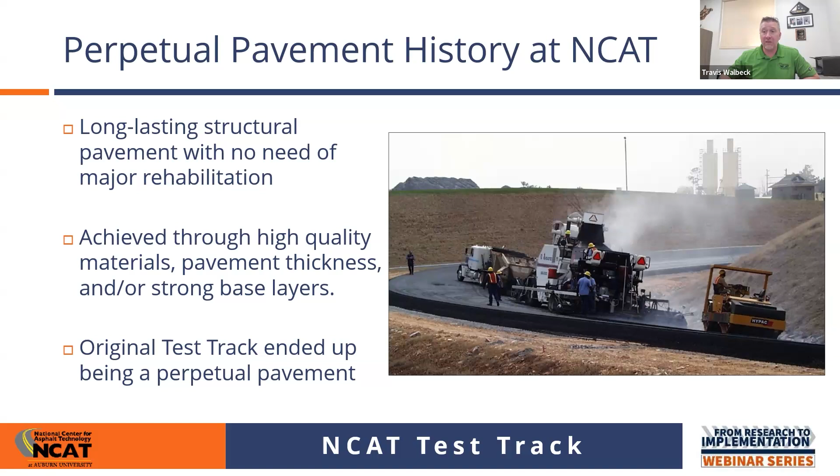So a couple of ways we can do this. We can just build the pavement really thick. NCAT test track originally built 2 feet thick, 24 inches, tremendous tonnage - that's one way to do it. Another way to do it is through really high quality materials. Some of the polymer modification or the binder rich layers that we've been able to put in have helped us build some perpetual pavements. So again, there actually are 2 sections on the test track that are currently in service that have never been rebuilt, and so it's really fun for us to see and watch how those sections perform.

So the thickness, the original 2000, that's one way to do it. This here is a graph that essentially shows a 14-inch pavement, right? That's far thinner, but it was built with this binder-rich bottom layer. It was put in place, a couple intermediate layers there, and an SMA on the surface. This full-depth hot mix section has performed just as well. It was put in in 2006. The strain gauges are in there that can gather all that data and watch and see how that performs.

So we only see top-down cracking. It's the only kind of cracking we see in this kind of perpetual pavement, which really does our heart good because we know structurally it's performing well. We just need to take care of the weathering or the environmental distresses we would see at the surface.

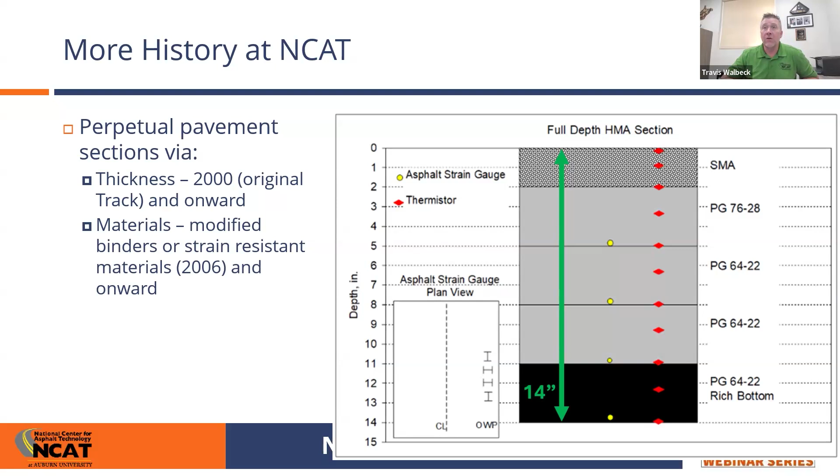So given that, I want to turn the time over to Suri, and he can go ahead and show you some of his work that he's done with these full-depth HMA pavements, and we'll go from there.

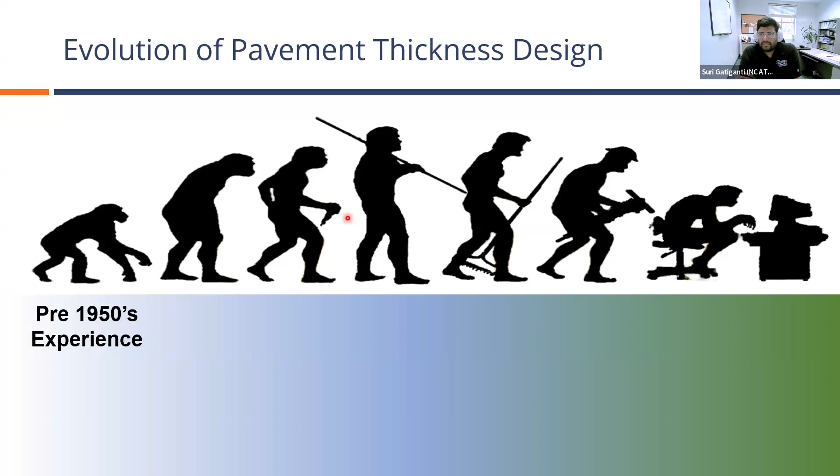A snippet of the evolution of pavement thickness design in the United States: pre-1950s, we were pretty much designing our pavements based on experience. But then in the late 1950s came the AASHO test, which formed the foundation for the empirical methods we're seeing, including the AASHTO 1962 design methodology and also the 1993 design methodology, which many states are still using, what we call AASHTO 1993 or Darwin software.

In the early 1980s, with the NCHRP 1-26 project, we started looking beyond just the empirical standpoint, because empirical equations could only account for the materials used at the AASHO test, the climate of that one location in Illinois, and the same subgrade material used in the AASHO test itself. The mechanistic-empirical methods can now take the mechanistic part of calculations, in terms of stresses and strains, into account along with the empirical equations.

In the 1990s, NCHRP 1-37 started, taking most of the LTPP data sets to form what we currently call the MEPDG software, which was released in 2004. Many states are currently in the process of adopting it, and many states already did adopt MEPDG as their primary design tool.

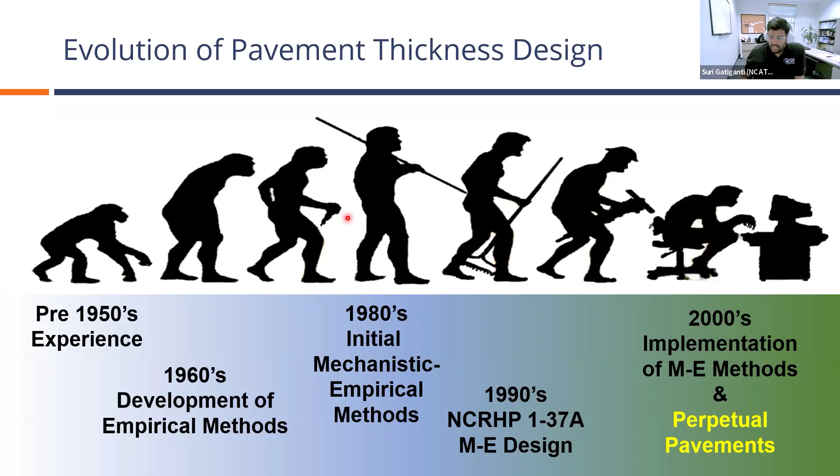So that's all about conventional pavement design. But what's happening in the perpetual pavement design scenario? Perpetual pavements were also kicking in during the same time frame, the 2000s onwards, with help from Dr. Carl Monismith's work and Dr. Thompson's work from UIUC, and from a lot of effort from the Asphalt Pavement Alliance and the NCAT Test Track. So I'm going to cover the perpetual pavement aspect of the story.

As I said, the majority of the empirical and ME approaches, the conventional flexible pavement design methods we have, including the '93 and MEPDG, rely on empirical and mechanistic-empirical approaches. The goal is basically to optimize the thickness. The goal of pavement design is to find how many inches of asphalt layer are needed, given the base, location, traffic, and materials in your state. What thickness do I need to come up with? That's the whole goal of conventional design approaches.

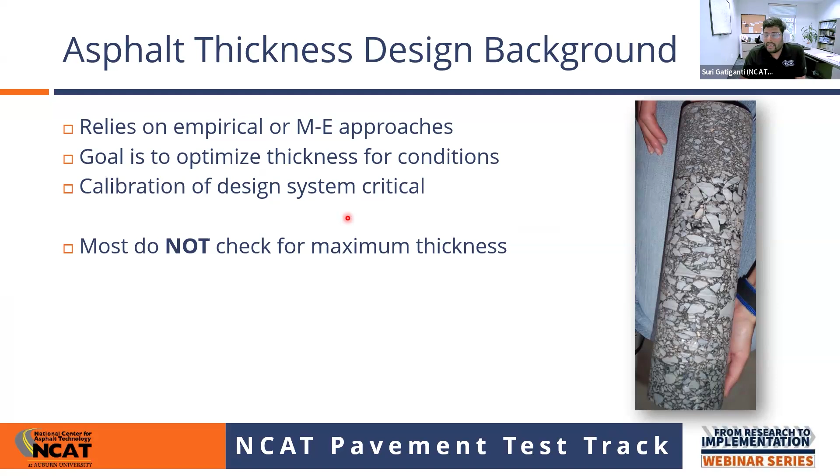But the problem is we do not check for maximum thicknesses. As Travis said, with the experience of the original test track, we got 24 inches of asphalt concrete, two feet. That looks like too much, right? So there is no check for a maximum thickness.

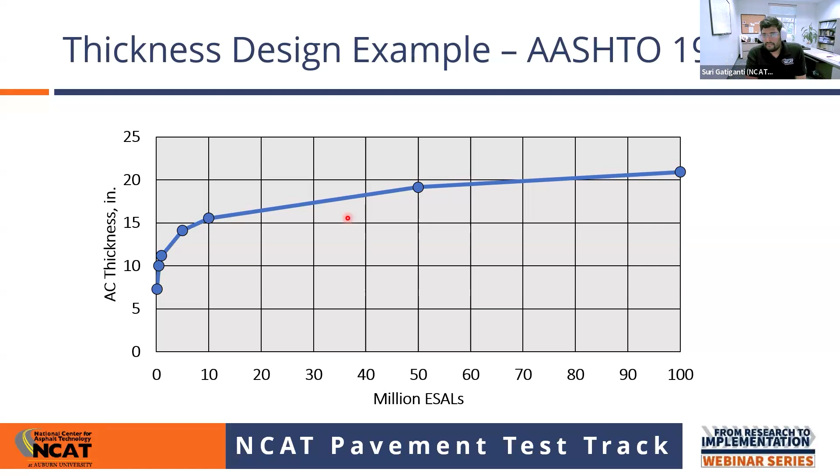If you see this in a more graphical format, here's an example. If you run the 1993 analysis or design with varying design ESALs, the equivalent single axle loads, because of the way the empirical equation works—it's a mathematical equation that takes million ESALs as an input—it keeps throwing out increased asphalt concrete layer thicknesses. If you say 50 million ESALs, it will say you need to build a 19-inch asphalt concrete layer. That sounds highly conservative because it's too thick.

But the question is, how thick is thick enough? Do we have a control or a check, a way to cap the thickness of the asphalt concrete layer, so that beyond that point, even though you're building your pavement thicker, there's no practical use of it? It's basically sitting there and serving no purpose.

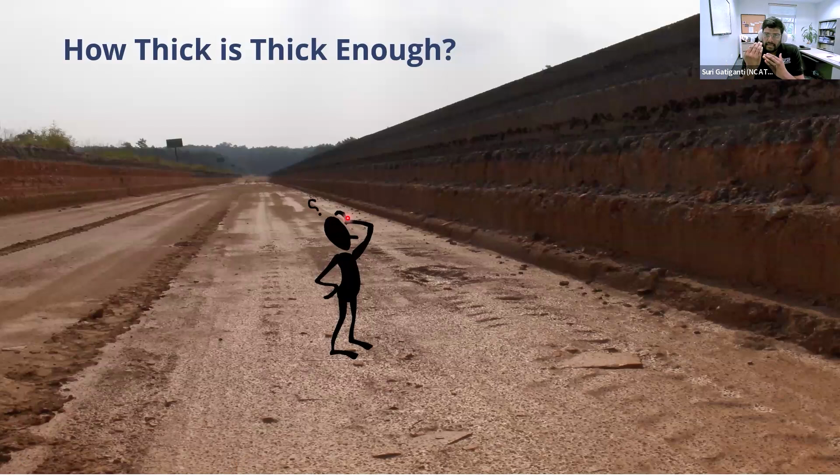And that is when we have the perpetual pavement concept. As Travis said, the whole definition of perpetual pavements is basically, if we build our pavements either by thickness or by using high quality materials, we control the structural distresses. Without any structural distresses, if we can confine the distresses only to the surface, we don't have to go back and do a major rehabilitation, like a complete reconstruction effort. If we can control the bottom-up fatigue cracking, which is structural damage, and also the subgrade rutting, and only limit the distresses to the top of the pavement, we can come periodically and just mill and fill that particular layer. So that way, we are basically saving a lot of material. That's the whole concept of perpetual pavements.

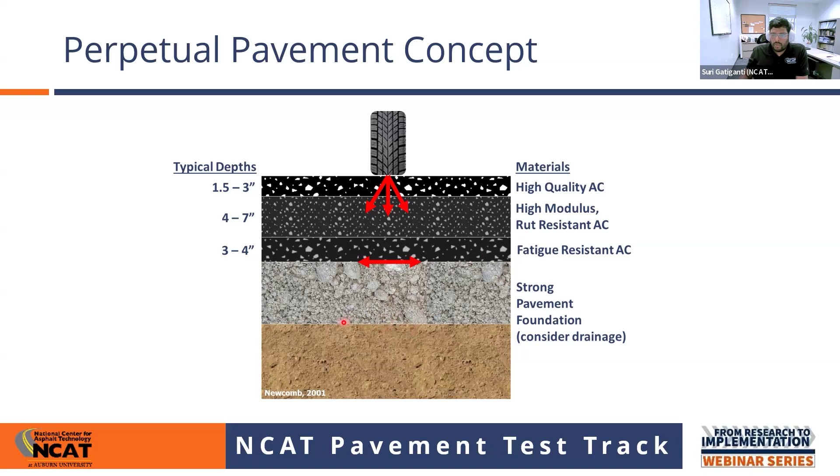The original concept was proposed in the United Kingdom, and then adopted by California, by Dr. Monismith's team for the I-710 project, and then adopted for one of the projects in Denver. The whole philosophy of all these initial perpetual pavement projects, as Travis said, is to have your surface layer as a high quality rut resistant mix, have your intermediate asphalt concrete layer a high modulus, high rut resistant asphalt concrete mix, and have a rich bottom layer which can resist fatigue cracking, all built on top of a strong foundation. That way, you're not allowing much stress to go to the subgrade, and you're protecting the subgrade that way.

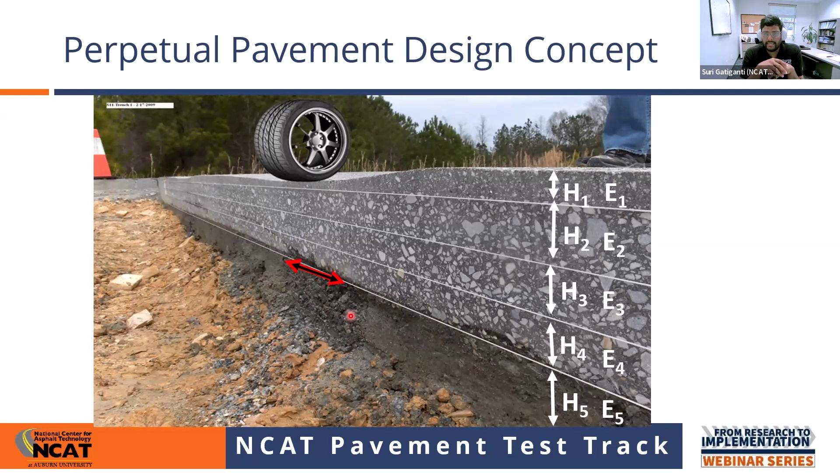As I said, this is a schematic that shows what we will be doing. The perpetual pavement concept itself is controlling the bottom-up fatigue cracking. We know once we apply a load on top of an asphalt concrete pavement, because it's flexible, it generates tensile stresses at the bottom of the AC. So our goal from the design perspective is to control that strain level to a certain value, so that we're not initiating the bottom-up fatigue cracking. Also, to limit the strain on top of the subgrade by controlling the stresses going onto the subgrade, so that we're not seeing any structural rutting happening.

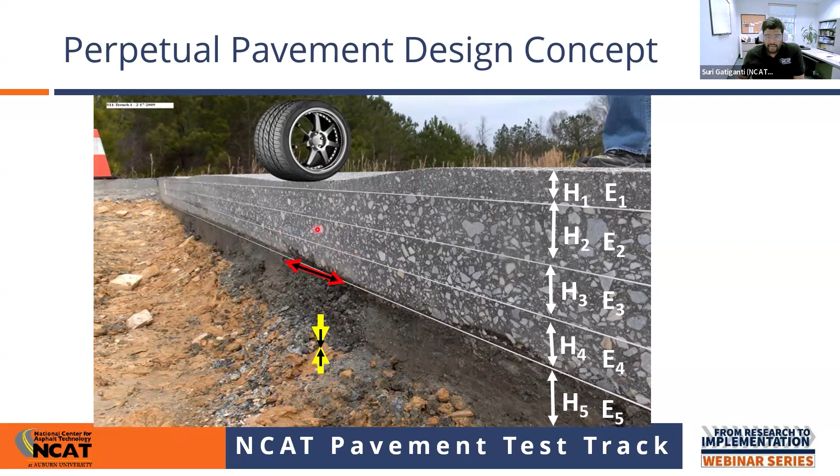Today's presentation, I'm going to primarily concentrate on the bottom-up fatigue cracking, because structural rutting is not a driving force once we start designing these perpetual pavements to define the thickness—it's actually the bottom-up fatigue cracking. And I'm going to spend most of my presentation time on the research that we did at the NCAT Test Track regarding the bottom-up fatigue cracking.

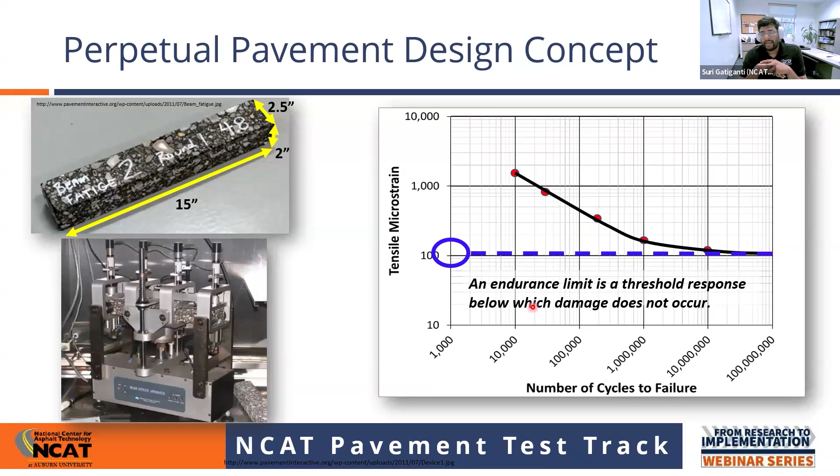For some of you that know a lot about asphalt mixture testing, the bending beam test is basically a strain-controlled test. As we decrease the strain level that we're applying on the beam, we start seeing increased life, because reducing the strain allows that beam to sustain for a longer time. For any material, there is something called an endurance limit. If you're applying a strain value below that endurance limit, that material is going to stay there for infinite life—meaning you're not causing any fatigue cracking or fatigue damage to that material.

Over the years, different researchers have tried to determine if there is an endurance limit for asphalt. In steel, the endurance limit is a big concept. In 1972, Dr. Monismith, with his research from UC Berkeley, came up with a number: 70 microstrain. If you're applying a strain less than 70 microstrain, that material is going to be perpetual, or that pavement is going to be perpetual. They used that 70 microstrain value for the I-710 project.

In 2007, as part of a big NCHRP project that Dr. Ray Brown at NCAT led, which was a laboratory study testing a bunch of beam fatigue samples, what Dr. Ray Brown and his team found was that for unmodified binders, the strain criteria is not 70, it's basically 100 microstrain. And once you start looking at mixes with modified binders, that endurance limit criteria is even higher, which is 250 microstrain.

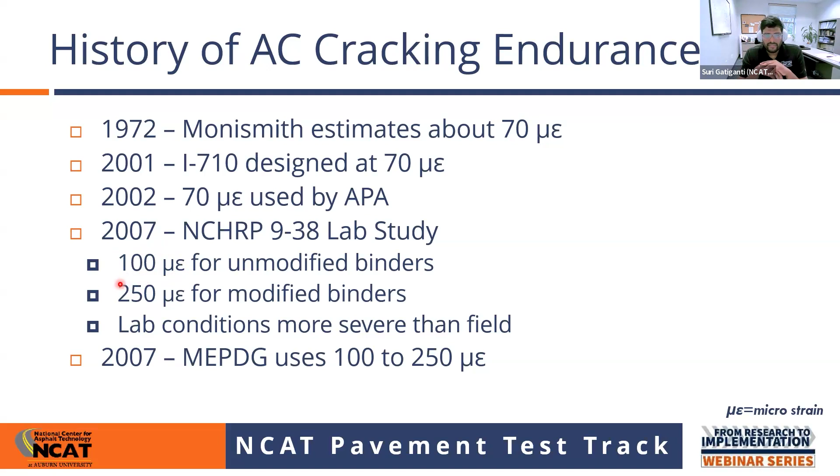But all the other studies until 2007 were looking at one single strain criteria. But we know our pavements are not going to experience one single load or one single temperature every day. Our temperature changes, thereby the modulus of the asphalt concrete layer changes, and on real roads we have axle loads that vary. So there is no single strain value that these traffic loadings and climate effects are going to produce. It's going to be a distribution at the end of the day.

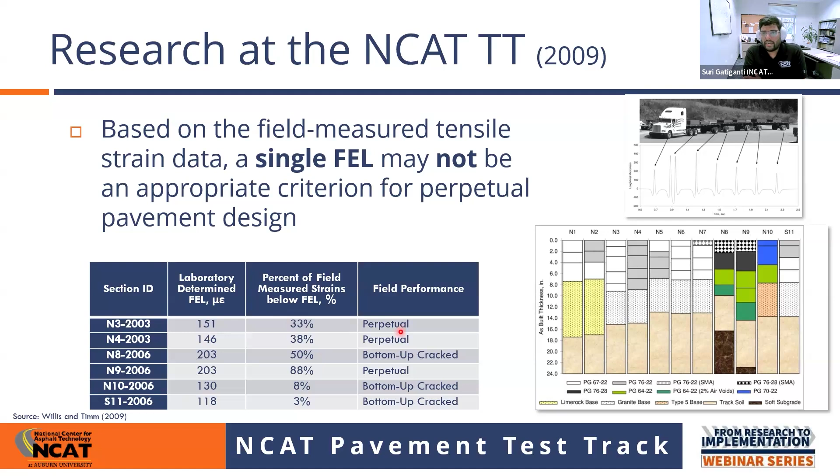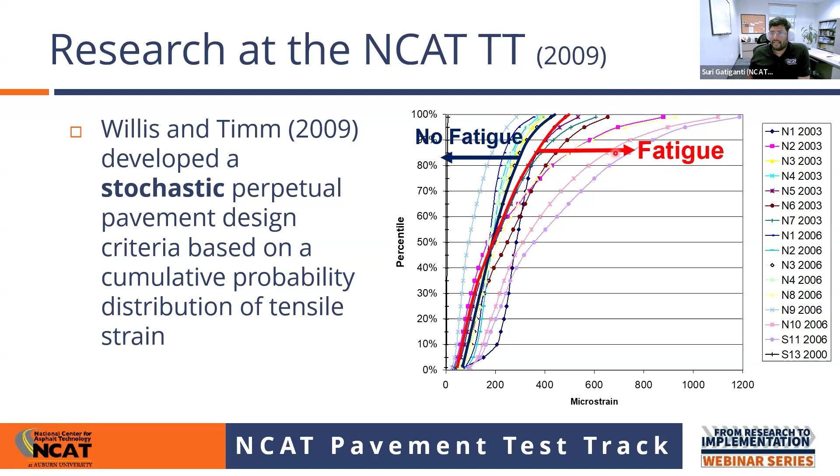So what they came up with is that there is no single strain value we can design our perpetual pavements with—it's a distribution. On the x-axis is the tensile strain at the bottom of the AC layer measured at the NCAT test track using strain gauges, and the y-axis shows the cumulative distribution. Sections that produced strain values lower than that dark solid line never saw any fatigue cracking, but sections that experienced higher tensile strain values than that red solid line did experience bottom-up fatigue cracking.

Those two demarcating points helped us come up with what's called the measured tensile strain criteria, proposed by Dr. Richard Willis and Dr. Timm back in 2009, based on field measured strains. But when designing pavements, we cannot use field strain measured values directly—we need to depend on some mechanistic calculation methodology, like elastic layer theory, because at the design phase you won't have the capability to embed pavements with strain gauges like we have at the NCAT test track. So we have to depend on linear elastic layer theory to design our pavements perpetually.

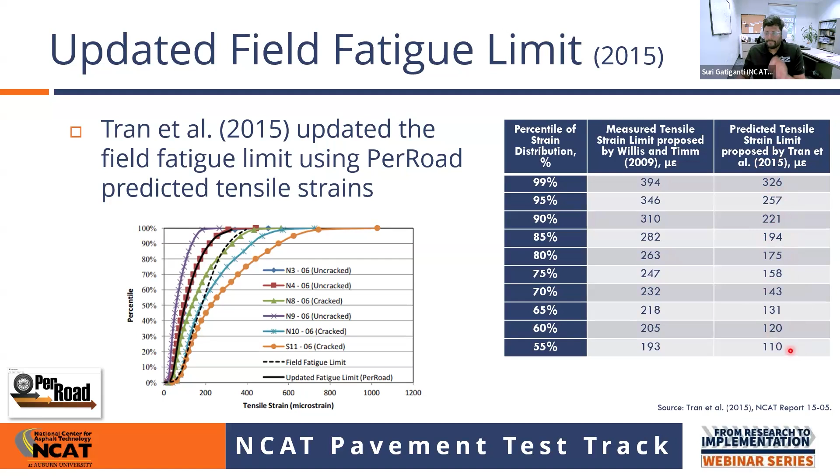So Dr. Tran and his team in 2015 came up with an updated strain criteria. If you're using the PerRoad software, the default threshold you see today is basically these values, shown on the rightmost side of the screen. This comes from the test track research in 2015.

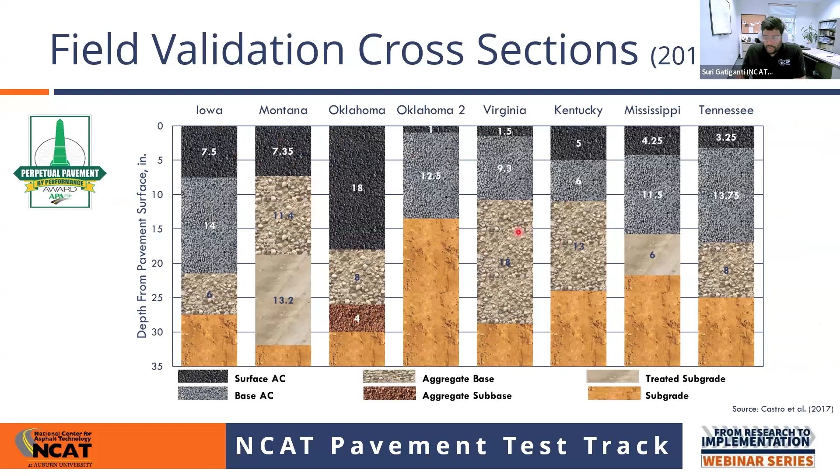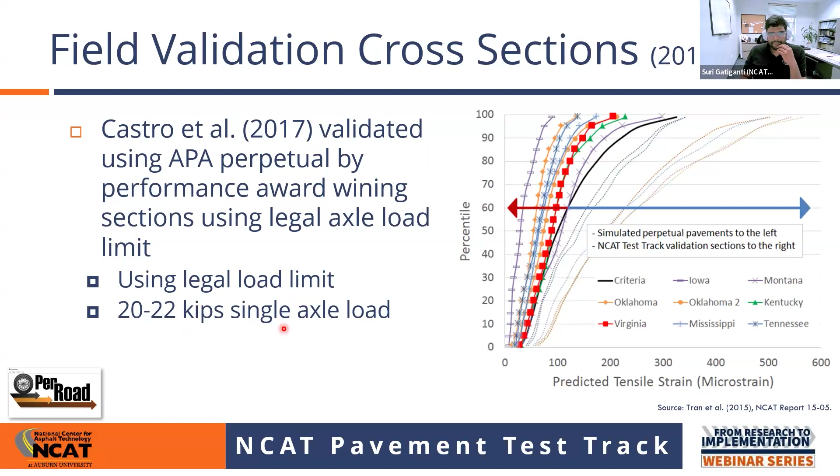But when simulating these strains, they did not use the actual axle loads that happen on a regular highway—they used the legal load limit with a 22 kip single axle load. I'm going to come to why that's important to mention. If you look at the NCAT axle load spectra, because it's an accelerated pavement facility, we have single axles.

We have five single axles weighing 20 to 22 kips load, a tandem axle between 38 and 42 kips, and a steering axle between 8 and 12 kips.

But if you look at the typical rural interstate axle load spectra developed by late Dr. David Newcomb and Dr. Timm, the NCAT test track loading is basically extreme, because it's an accelerated loading facility and we want to apply more number of axles in a very short span of time. So it makes sense that the axle loads we apply are very close to the US legal load limit.

All the studies you saw at the test track until this point—2009, 2015, 2017—were based on that high intense loading level. Even the validation work done in 2017 used the US legal load limit.

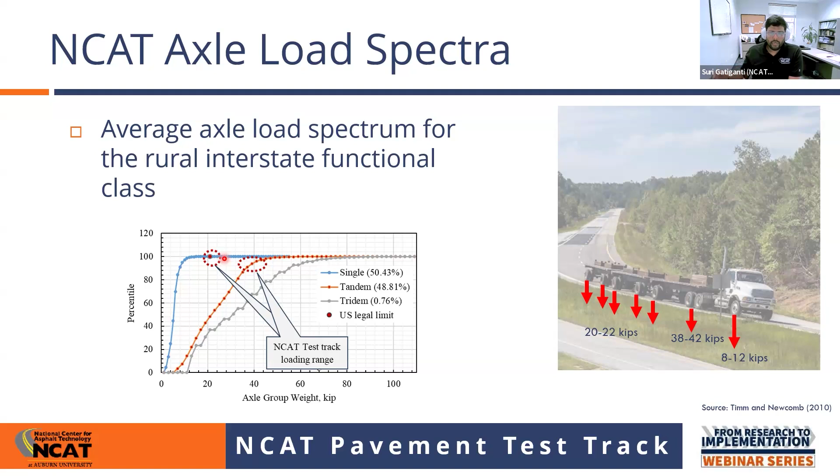But the actual question is, if I'm a designer working for a DOT, and I don't use the legal load limit but instead use my own axle load limit from my WIM data for the state, would this criteria still hold true?

So that was the question we wanted to answer: can the criteria that came from the 2015 study hold true if we apply the highway load spectra, which is much less intense than the NCAT test track or the US legal load limit?

So we got 31 test sections with the help of ALDOT from across the state, and we also have the coring information for all those test sections, so we know whether those sections had bottom-up fatigue cracking. If you see the right side of the screen, we know whether a section was bottom-up fatigue cracked or a perpetual section, and we were able to get that from the coring information.

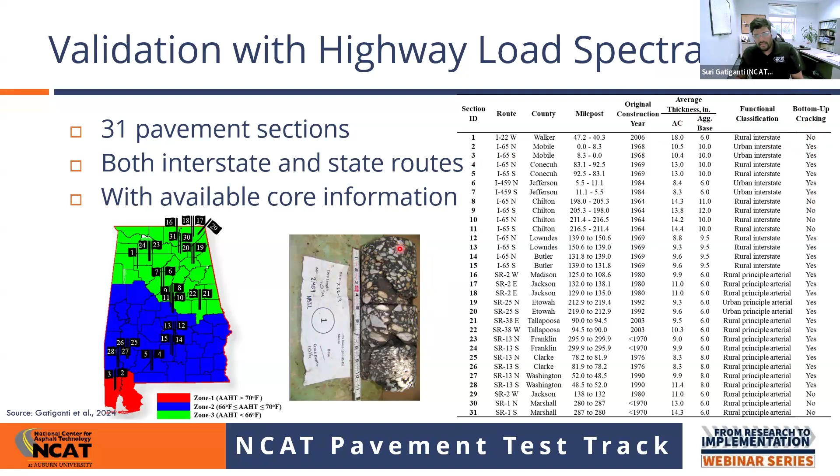So what we did is the same thing Alfredo and his team did in 2017. Even though these sections are on interstate or US highway, let's assume 100% of the time the pavement experiences that 22 kip single axle load, which is the extreme condition that pavement can experience.

When we used that to verify whether it's demarcating the sections that failed with bottom-up fatigue cracking from the sections that did not fail, it was holding true. All the red data points you're seeing are cracked sections, and all the green sections you see are uncracked, basically the perpetual sections.

Of the 31 different test sections, or actual highway sections, the black line—the threshold from the 2015 study—was able to correctly demarcate the perpetual sections with lower strain levels from the bottom-up fatigue crack sections, which had higher strain than that limit, in all 31 cases. So that was good.

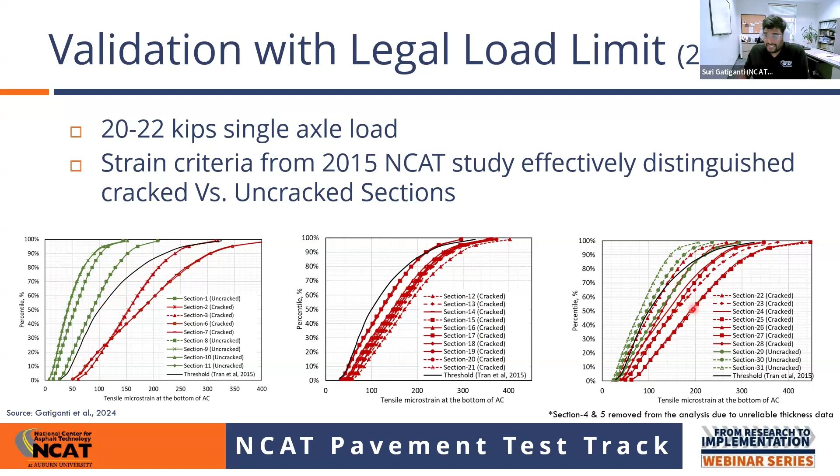But what if we simulate those sections differently, not using that extreme condition where 100% of the time the pavement experiences only that single axle, but instead using my WIM data to simulate my actual highway load spectra?

So the dark solid line you're seeing here is the one proposed in 2015, but it failed to demarcate or identify the sections that actually failed with bottom-up fatigue cracking.

If I'm using that criteria from 2015, all of these sections are supposed to not crack. But four of those sections did crack.

So what that means is, if you are using the legal load limit to simulate during design, you could use the 2015 threshold limits. But if you're a designer wanting to use your own highway load spectra, you cannot use that, because it failed to demarcate correctly.

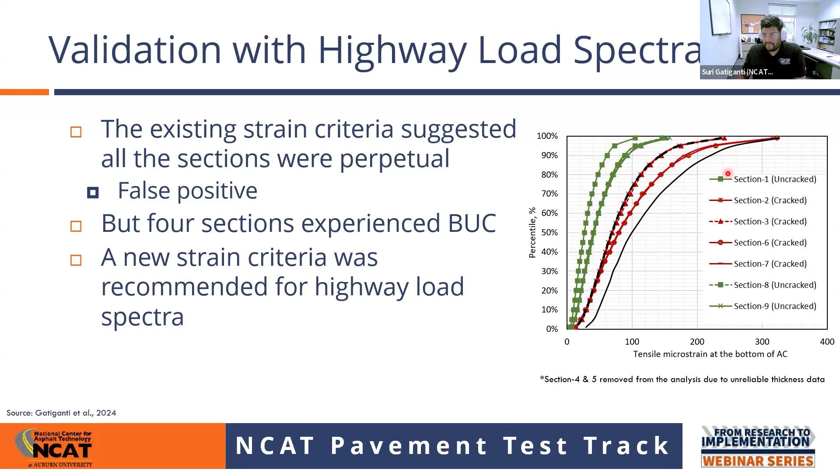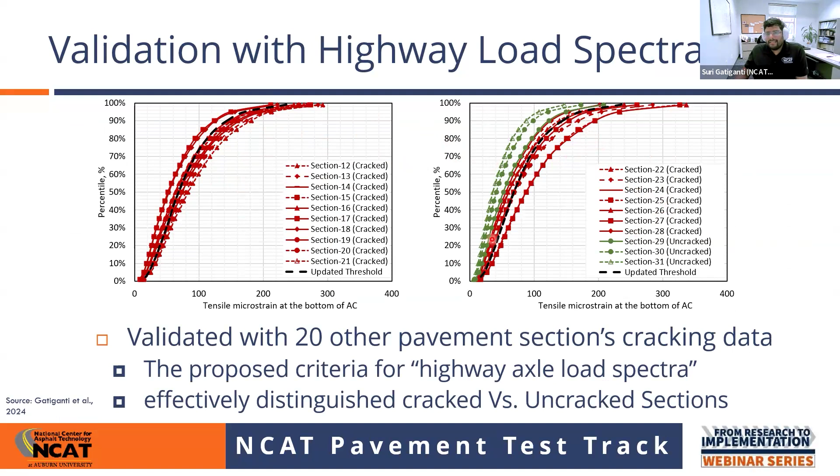That is why in the 2024 study we proposed a new threshold limit, a much lower threshold than the 2015 one, and verified it with other sections from ALDOT's highway network. The new updated dotted black line is able to correctly characterize the sections that failed versus the sections that did not fail with fatigue cracking.

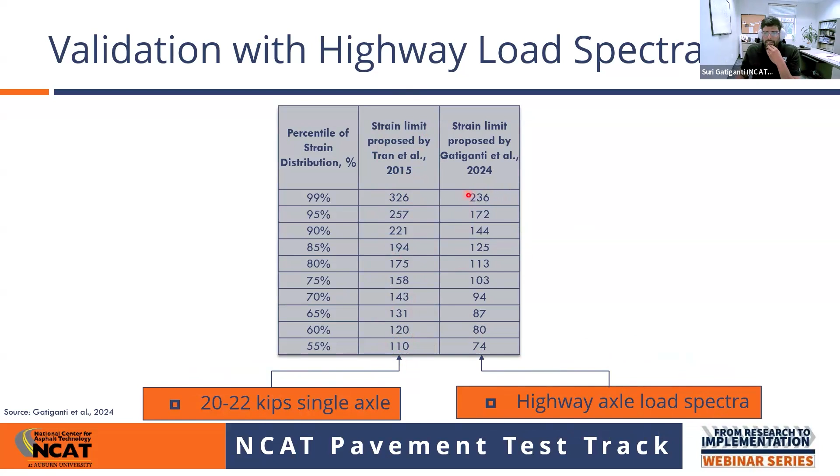So in the end, what we were able to find from 2015 to 2024 is basically, if you're using legal load limit during your design process to simulate your traffic levels, you can still use the 2015 threshold values, which are basically default in PerRoad software today. But if you decide to use the axle load spectra from within the PerRoad software, you have an option to select default values for an interstate versus a major arterial versus a minor arterial. If you decided to use that axle load spectra rather than the worst case scenario, please use the newly proposed threshold limits, which are much lower.

But how does this perpetual pavement design concept help agencies that do not right now use the perpetual pavement designs? What is the application of this concept from a regular conventional thickness process?

Because at this thickness, in this example of 12 to 13 inches, this pavement is never going to see any structural damages. It's going to only see damages in the surface layer. So we come back and mill and fill every 12 years or 15 years, depending on the state, as a preservation activity. But building those extra 6 or 10 inches, we are basically losing money without proper or optimized use of the material. So this perpetual design concept is very helpful to cap off thicknesses for a given state.

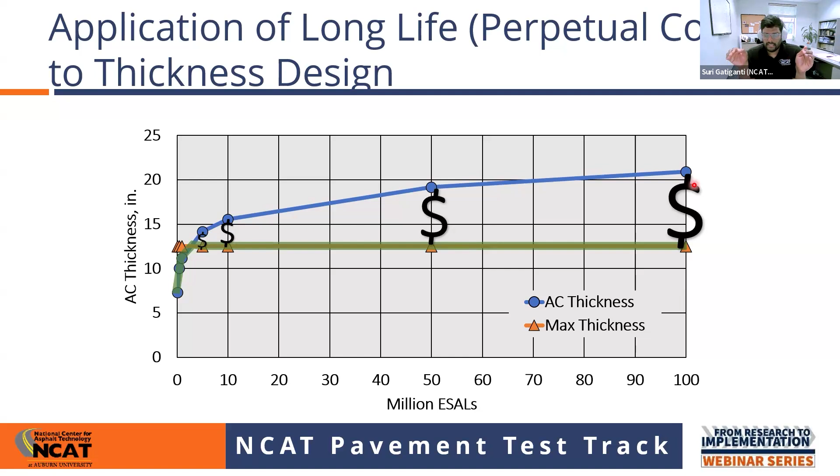As an application, we did the very same thing for LDOT, where we came up with max thicknesses. LDOT right now uses AASHTO 1993. If the thickness obtained from the 93 is above a certain value, we divided the whole state into 3 different zones depending on the temperature, basically the climate. The southern zones are the ones with the hottest temperatures, and zone 3, the northmost one, is where the temperatures are the coldest.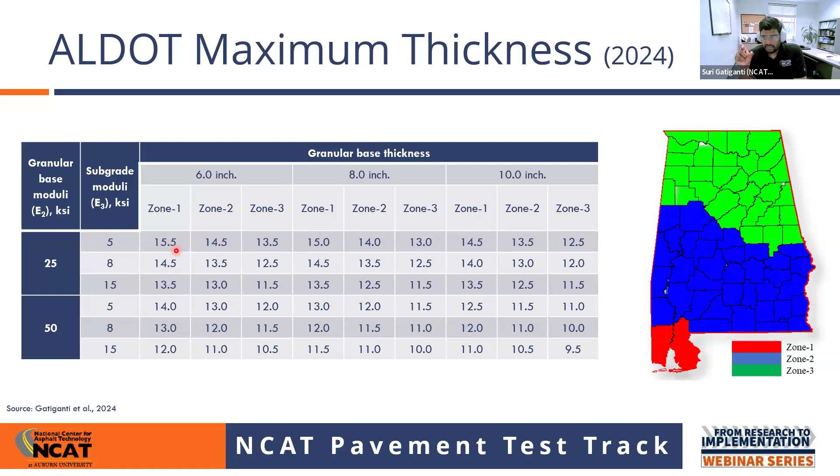So for example, these changes depend on the given base moduli and subgrade moduli. Let's say ALDOT is designing a pavement with 6 inches of granular base, which has a 25 KSI modulus value and a 5 KSI subgrade value, the max thickness we propose to ALDOT is 15.5 inches. So if ALDOT is using AASHTO 1993 for that scenario of pavement, if the thickness comes out to be 19 inches, they can just build 15.5 inches because this pavement is perpetual at that point, and that extra 3.5 or 4.5 inches is basically serving no purpose.

That's how the states can actually use this perpetual pavement concept in their regular conventional design as a cap-off criteria or as a max thickness criteria.

What are the softwares out there for perpetual pavement design? Dr. Timm developed PerRoad software, which is used for high traffic level road pavement design, perpetual design, which is embedded into PaveXpress today. So you can use either PerRoad or Pave Express, both of them serve the same purpose. But Dr. Timm also came up with another tool called PerRoad Express. This is for low volume roads. If you're trying to design low volume roads perpetually, we suggest using the PerRoad Express software. You can access the PerRoad software and PerRoad Express software from the QR code on the screen.

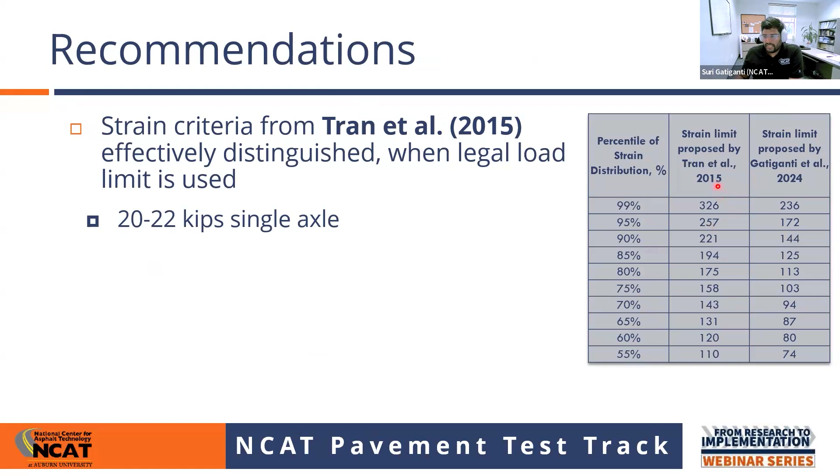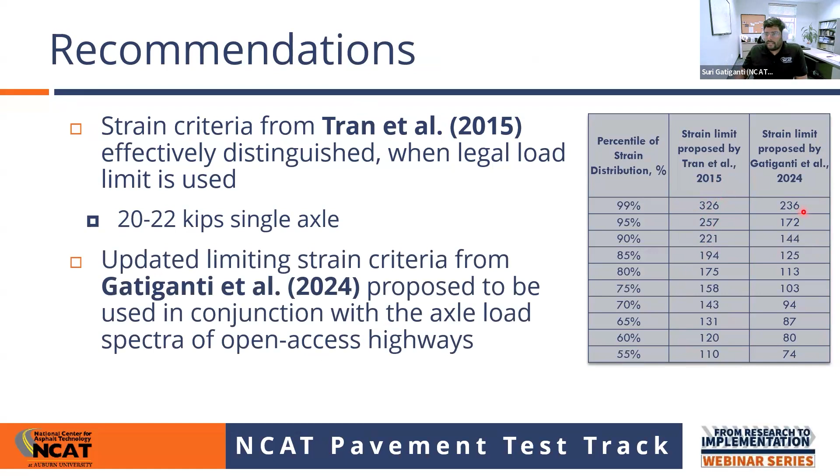In summary, the recommendations are: if you're using a legal load limit basically 100% of the time, that pavement is going to see only the 22 kip single axle. Please use the threshold from 2015 from Dr. Tran's study. But if you're trying to use the actual highway load spectra to simulate your pavement's traffic levels, please use the updated threshold values for limiting the bottom-up cracking.

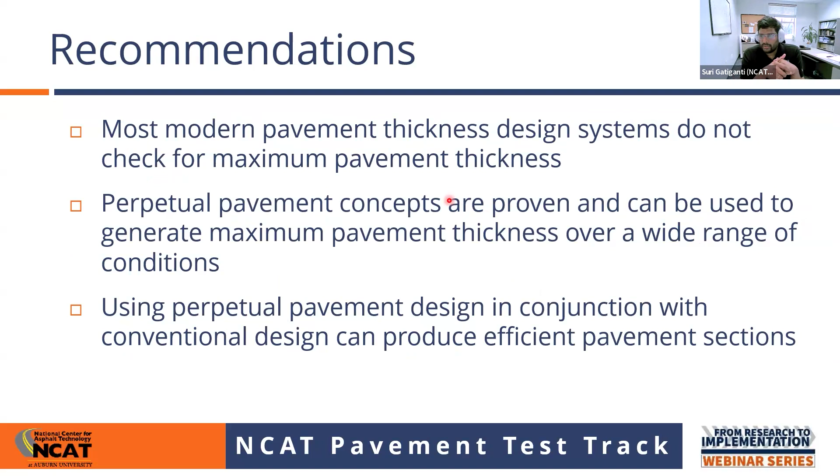Also, as we talked about, most of the pavement design thickness systems out there, including the 93 and sometimes MEPDG, do not check for maximum thicknesses. We do check for minimum thicknesses, but we never check for the maximum thicknesses. If we can adopt or combine the perpetual pavement concept with conventional designs like the 93 and MEPDG, we could basically optimize the usage of resources by capping off the maximum thicknesses.

And these are the references I use throughout the presentation. If you're interested, please go access those reports and papers. And with that, I'm going to hand it off to Mike.

Good morning, everybody. Thanks for joining us. Suri just shared a fantastic summary of how we got to where we are today with perpetual pavements and why they're important to the industry. I'm going to take that to the next step. Our role at the Asphalt Pavement Alliance is how do we take this message and turn it into deployable, actionable items for agencies and owners across the state. So let's go through that.

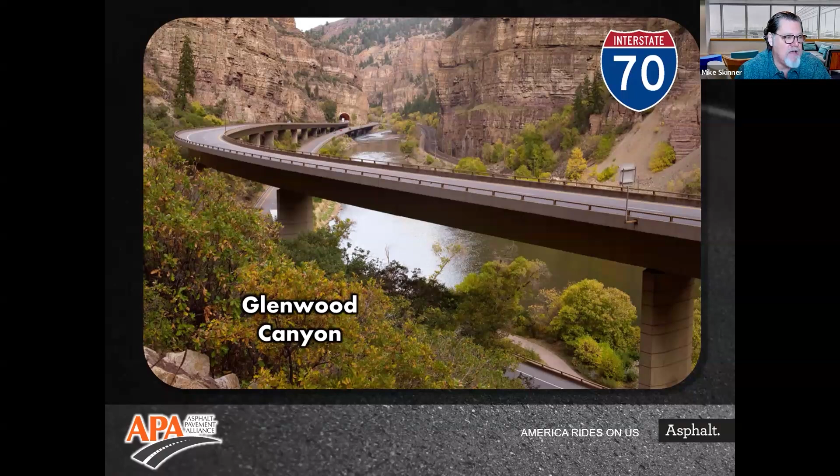But where I'm going with this picture is it talks about our industry in terms of resilience and quick, speedy recovery from accidents like this. This is another example, just like Red Mountain Pass, that if Glenwood Canyon closes, it's another 200-mile detour for all interstate highway traffic and cargo that has to detour up through northwest Colorado on small state highways.

So speed of construction, speed of repair, and resilience is really a hallmark of our industry. But let's talk a little bit about how we promote our industry and how we engage with local agencies and DOTs across the country. We do that through the Asphalt Pavement Alliance.

Those of you who aren't familiar with the APA, it represents the three premier stakeholders of the industry: the Asphalt Institute, the National Asphalt Pavement Association, and the 40 or so different SAPAs that exist around the country. In addition to that, we have strategic partnerships with NCAT and other industry associations.

But I like to have this discussion as we're talking about perpetual pavements, how we maintain our interstate highway system, the billions of dollars that are invested across the country. The blue lines there are the interstate highway system. The red lines are your state highway systems maintained by your DOTs.

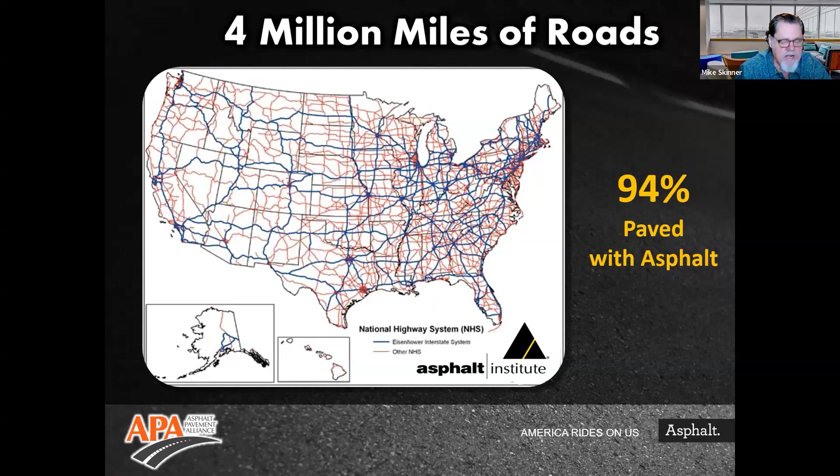But are we promoting it from commercial pavements? How do we promote and how do we leverage our brand and move forward? Perpetual pavements is a hallmark of the ability to do that. I'll show you an example in a minute.

Just last week, I happened to be over in Louisville, Kentucky for the NAPA mid-year meeting. I took a little side trip. Those of you that are familiar with Kentucky, you'll know that's home to the Bourbon Trail, which is the district. It's not an actual road, but it's a district between Louisville and Lexington with all the bourbon distilleries.

So I was back there driving the beautiful back roads of Kentucky, and I stopped and made a little video, put it on LinkedIn. I just said, listen, the Bourbon Trail, it's paved with asphalt. Look at these beautiful roads in the back roads of Kentucky. So those are some interesting ways that we promote the industry.

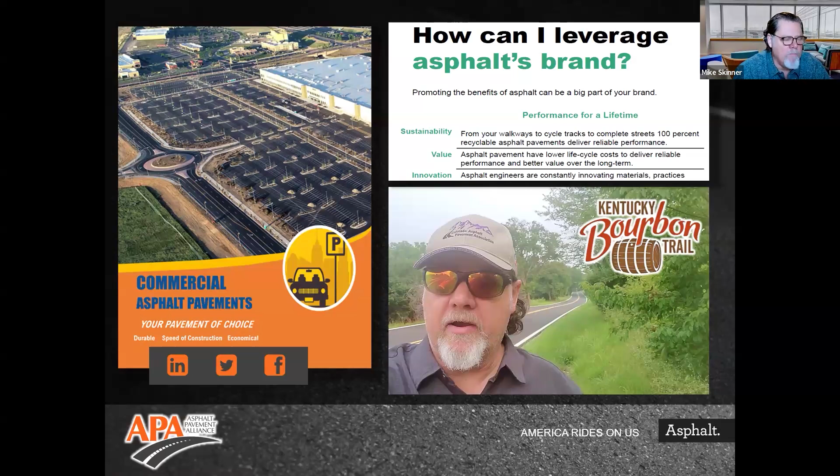But when we get to the topic of perpetual pavements, quality is truly the core of our industry. All of us exist to promote quality in our industry. And our perpetual pavement awards demonstrate that perpetual pavements are not just cost effective, but they're built to last.

And when we get into the cost effective element of perpetual pavement, that's a whole other webinar. But the initial construction cost savings to an industry can be very significant, that can either control the budget for a project, or at a set budget can extend it and add additional lane miles because of the perpetual concept.

So this was a photo that Suri showed a little bit, and I like to talk about general rules of thumb, because when we're talking about promoting an industry across the country and across the nation, we can't get too specific. But when you fall into that realm of 11 to 14 inches, you start to talk about maximum thicknesses. And if you're doing your designs with optimized materials, high quality materials, whether it be the aggregates or the mixed design philosophy, balanced mixed design, or using polymers in different applications, you can live in that 11 to 14 inch range and have it become perpetual.

Which Travis and Suri have both commented on, the fact that if we build it where we don't get structural cracking bottom up, and we only have to deal with surface cracking, which is significant where I live here in Colorado because of our extreme elevation, number one, and our freeze thaw cycles.

But if we can keep our cracking in the surface lift, then it's a win-win for the agency.

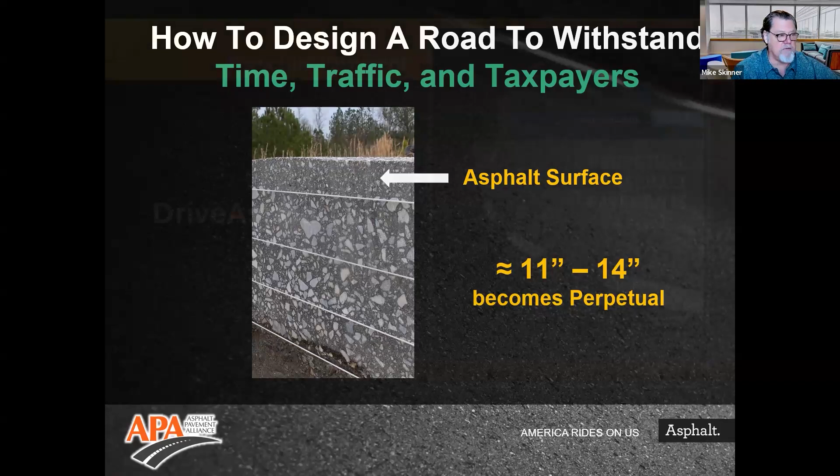So resources for you that are out there either doing design or considering this. We do see a little bit at the local agency level, and I'll talk about that in a minute. But for the DOT level, there are lots of great resources out there. One place I'd point you to start is the APA website, driveasphalt.org. There's a whole section there on perpetual pavements and resources curated from synthesis of information that will also lead back to the resource library available from NCAT as one of our partners. There's a plethora of information.

The last thing I'll share about resources is that here at APA, we are actively developing a new ebook, which will be published. Roads and Bridges Magazine is actually putting it together right now. It will live online and be about 20 pages, so short, sweet, to the point. It will not be a design guide, but a synthesis of current activities for perpetual pavements with hyperlinks to all other resources that will become available. Look for that ebook to come out a little later this year when it's finished and published.

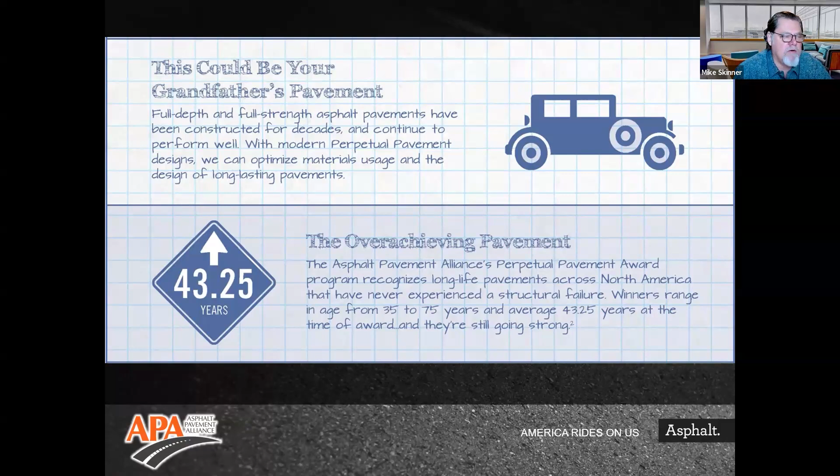So what does this awards program look like through the Asphalt Pavement Alliance? Typically a DOT will identify a segment of road. They might also do this in conjunction with help from their state asphalt pavement association, but they'll put together a submittal package and send it into the Asphalt Pavement Alliance. Once we collect all of these nominations, they're all submitted to NCAT for judging. There's a pretty rigorous set of criteria that NCAT reviews for every nomination to determine whether this road as nominated meets the criteria—I'll share the criteria with you in a minute—of a perpetual award. Then we get that list back from NCAT, and then we award the different winners.

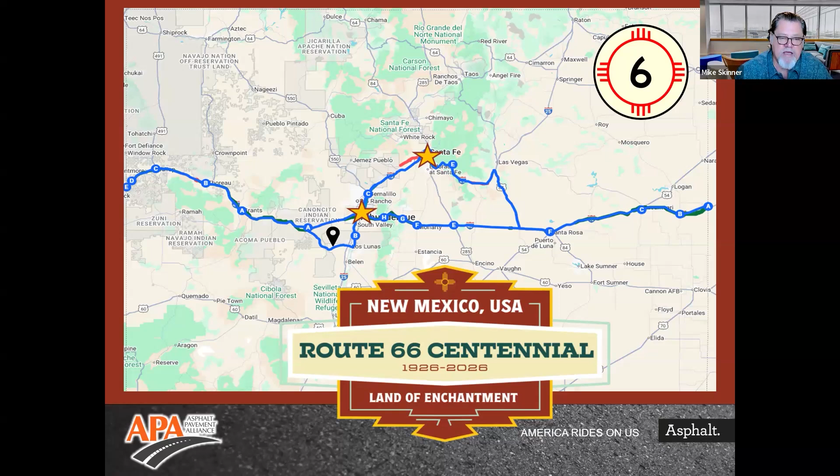So here's what that section looks like for the New Mexico DOT. That stretch was built in 1928. It's been resurfaced, milled and overlaid, and that's appropriate to maintain the road, but there's never been a structural failure on this road, and it's never received more than an additional 4 inches of material net. That's part of the criteria for winning.

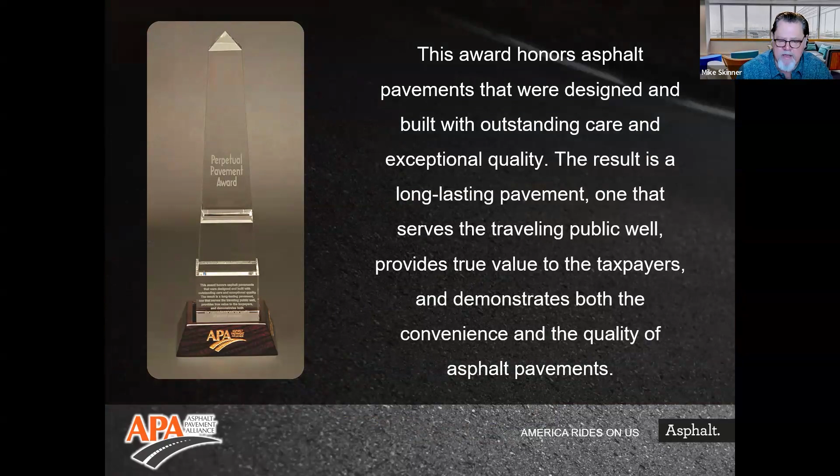Here's the criteria: the road has to be a minimum of 35 years old. It has to have a minimum of at least 13 years on average between surface treatments, meaning mill and overlay or minor rehabilitation—not crack sealing or things like that. It has to be a minimum of 13 years between mill and overlays, and you can't have any more than a 4-inch net increase to your roadway.

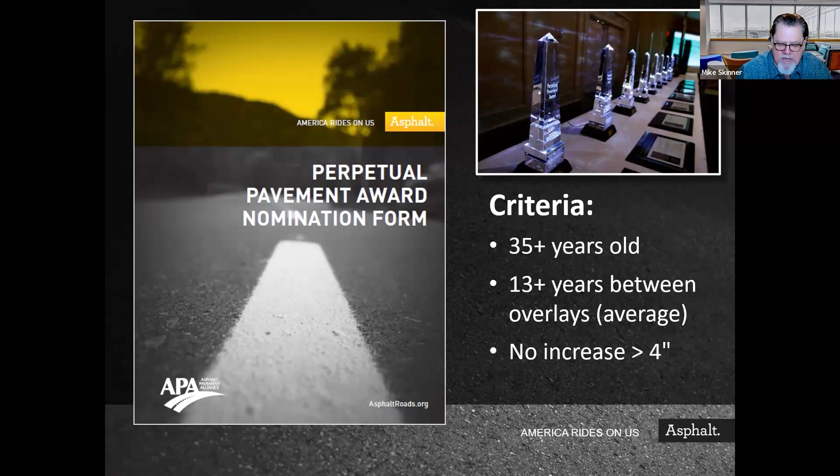If you meet those criteria, you can submit your nomination, and NCAT will then judge it and look at the historical performance data on the road to be eligible for a perpetual pavement award.

So with that, Travis, I'm going to turn it back over to you as a moderator. I see we have some questions, but that's an industry perspective of what I wanted to share about taking the technical side of a design and how we can incorporate that for DOTs across the country successfully, accelerating initial speed of construction and long-term performance.

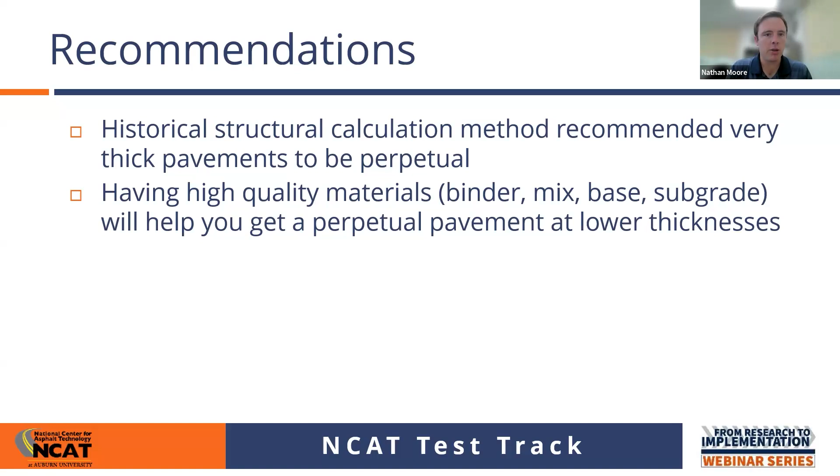So just in closing, historical structural calculation methods recommended very thick pavements to be perpetual. Suri talked a lot about that, and Travis mentioned that at the beginning. But what I like about perpetual pavements is really that it rewards high quality materials. You can get perpetual pavements just by making a really thick mix, a thick pavement cross section, but having high quality base, subgrade, binder, and mix will help you get there with lower thicknesses. Both Suri and Mike talked about that.

Perpetual pavement concepts are proven concepts, and they can be used to generate maximum pavement thicknesses over a very wide range of conditions. In the work Suri talked about, with different climate zones and different materials, Mike even made the statement about how you can build one of these things in any climate, any traffic condition, any load spectra, using a wide range of materials. A lot of these tools are already proven and they work.

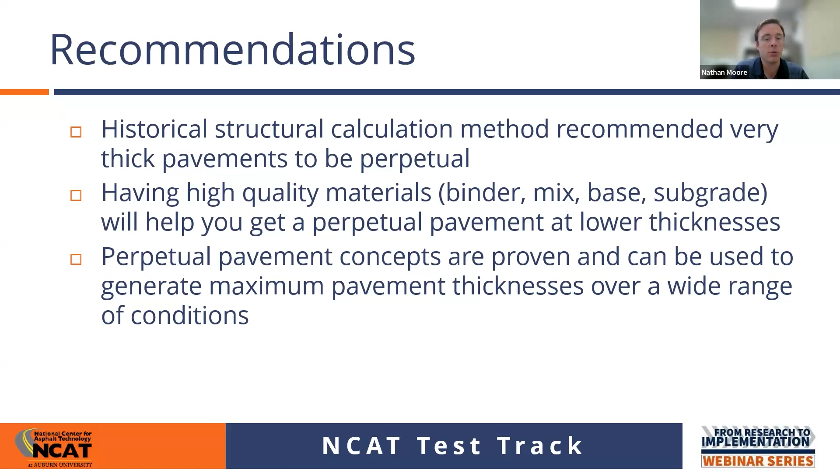And then applying them, the conventional tools that we have, to the perpetual pavement concepts can help us get there.